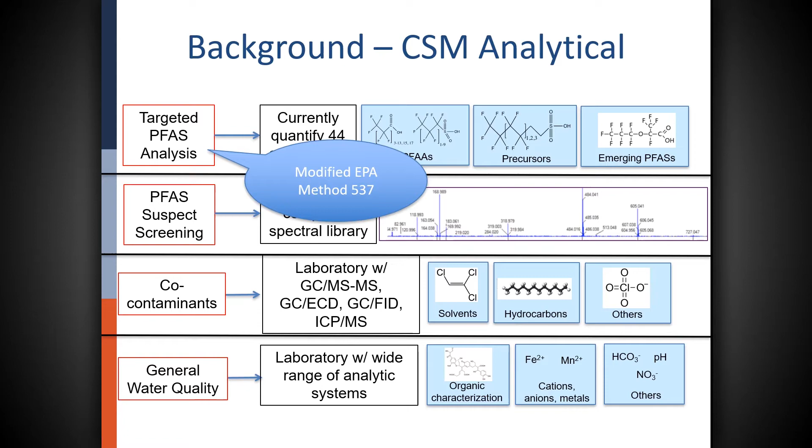So, analytically, we have targeted analysis, suspect screening, as well as looking for co-contaminants and general water quality. Today I'm going to be focusing on the targeted PFAS analysis, which is essentially a modified EPA method 537, because our methods were developed prior to the EPA coming out with this method. We used large volume injection as well as a QTOF.

So CSM is in a pretty unique situation where we have a lot of pilot scale laboratories on campus and off campus. The top left picture is a new facility we're involved with in East Denver, which used to be a produced water treatment facility for an oil and gas company. So there's every sort of technology there available to us to look at different treatment technologies.

In the bottom right, we have a full-scale wastewater treatment facility on campus that treats the dorm rooms' wastewater. And we have a pretty good ability to build pilot-scale treatment systems in-house, such as the bottom left corner.

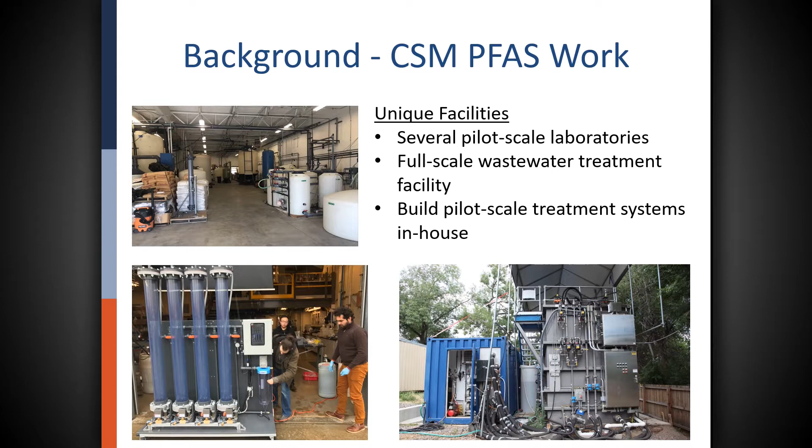So a little bit of background. I might be the only person presenting today that is at liberty to say where some of these issues are, because it has been so widely published, such as this article in the New York Times, which is essentially accusing the U.S. Air Force of contaminating drinking water from a site in Colorado Springs, and the plume migrating all the way down to Fountain, Colorado, which uses groundwater as their supply.

And so this is a public CDPHE map of all the contamination and the plume in the Widefield aquifer, which prior to these issues being published was their only supply.

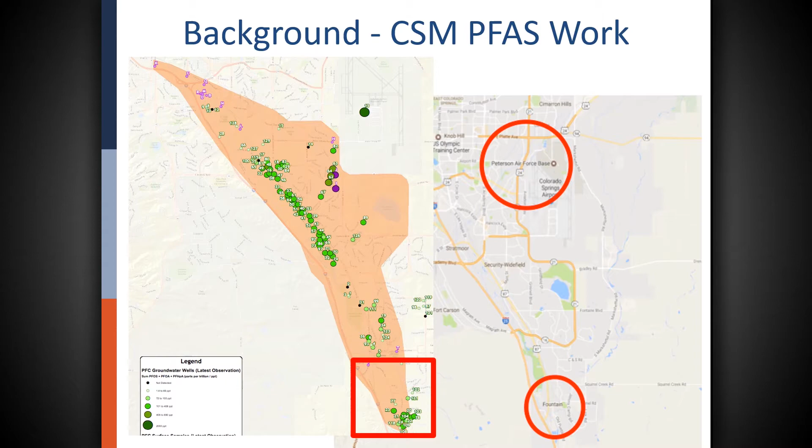So that led to Mines being in a pretty fortunate position. You have this huge site very close to home, and you have these analytical capabilities and essentially experts in the field. So who is the Air Force going to call? Well, they're going to call their legal team, they're going to call their PR, and then they call Mines to set up a system and see what they can do.

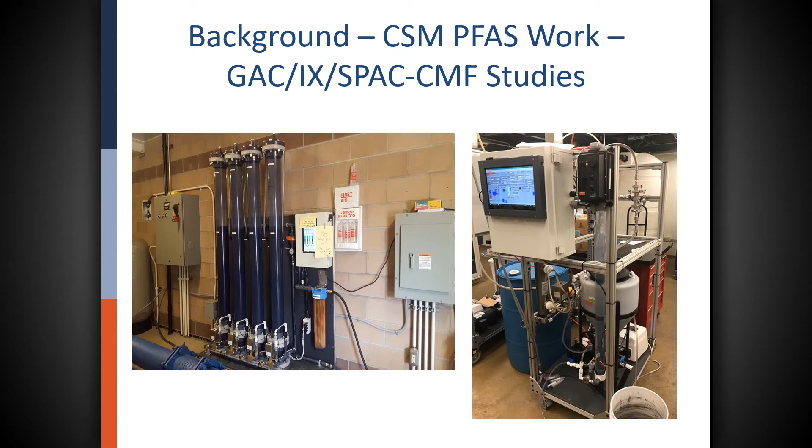So this is the first pilot study on the left, essentially 4 different GAC contactors evaluating the efficiency of all the different media. That led to more studies, and on the right is a preliminary study of submicron powder activated carbon with ceramic microfiltration. That's going to be also a study moving forward with Arcadis as one of the industry partners.

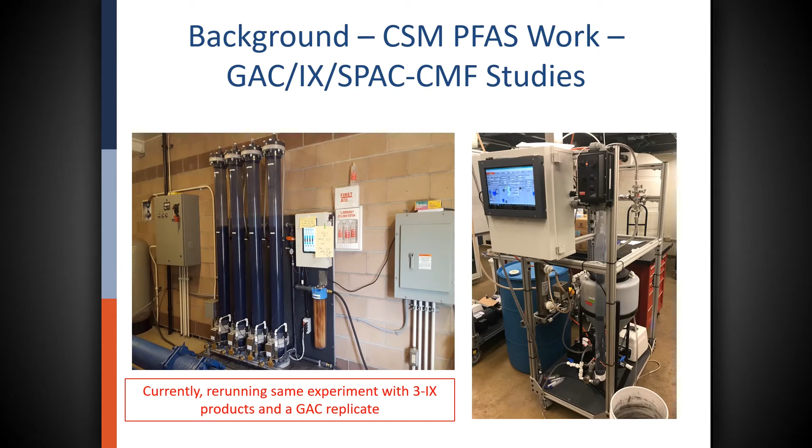The left study is currently being rerun with 3 ion exchange products as well as a GAC replicate to confirm the results from the previous study. And these studies last around 7 months, so the data isn't there from one day to the next.

We also look at novel treatment technologies. This is nanofiltration and concentrate treatment. I won't get into that too much because it was run by another one of our lab members, Charlie Liu. His email's there if you'd like to contact him. Essentially, it's showing that we can get above 95% rejection of these compounds.

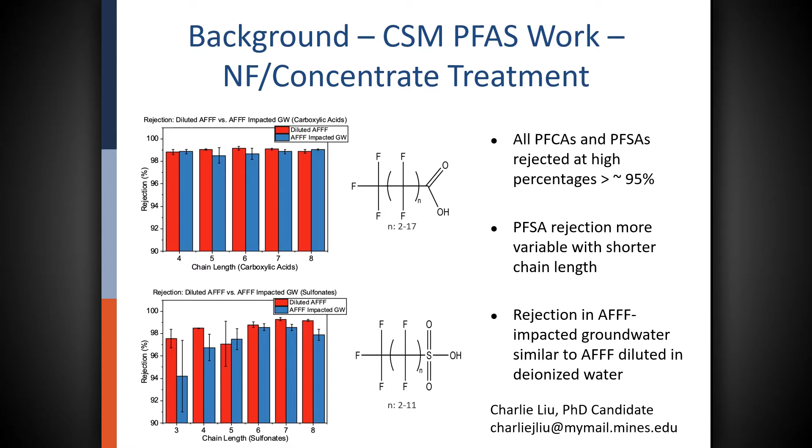And that means when you're rejecting all these compounds, they're all going to be accumulating in the concentrate stream. And you have to figure out what you're going to do with that heavily contaminated concentrate stream. One of the ways they've thought of is UV bisulfite. I'm not very aware of all the processes that occur in that situation, but it has effectively been demonstrated to work, and this is going to be published very soon if it hasn't already been published.

So for the engineers in the room, how do we design these systems? First, one of the most important components is the empty bed contact time of your vessel, because that's basically dictating how fast or slow things can sorb and desorb. Hopefully sorb in this case. You don't want things coming back out into your drinking water. The guidelines for the AWWA say that the median for empty bed contact time is approximately 10 minutes.

However, the CDPHE, the Colorado Department of Public Health and Environment, which I'm going to reference a little bit because we're working in Colorado generally, has come out with recommendations of 10 to 20 minutes with hydraulic loading rates of 2.5 gallons per minute per foot squared and some sort of lead lag configuration, which means you have a lead column and a lag column. Ion exchange systems are somewhat different: shorter empty bed contact times, similar hydraulic loading rates, but bed depths are different.

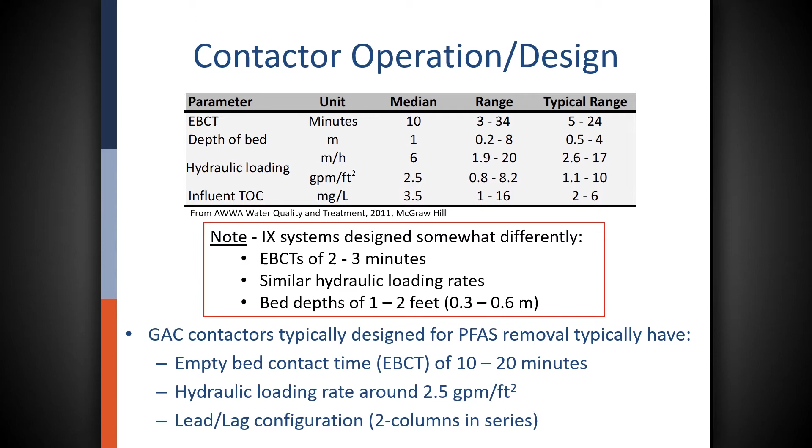And so what I mean by lead lag is essentially you can have 2 contactors. The contaminated water can flow into the first one. It then flows into the second one. They can be set up to have either 10 minutes empty bed contact time each, which would get you to 20, or 5 and 5. Ideally 10 and 10 just for safety. Then you have your drinking water at the other end.

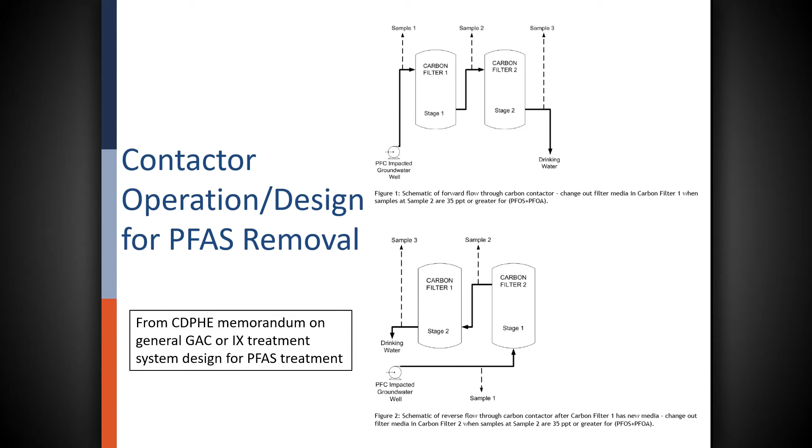When that first column gets exhausted much faster than the second column, you could replace the first column, reverse the direction of flow, and that way it becomes the second column. And now you exhaust your second column and can replace and so forth. There are a lot of ways to do this, including more parallel, more in series. It's really dependent on your source water, what you're trying to do with the water. But there are some guidelines out there for how to design these systems.

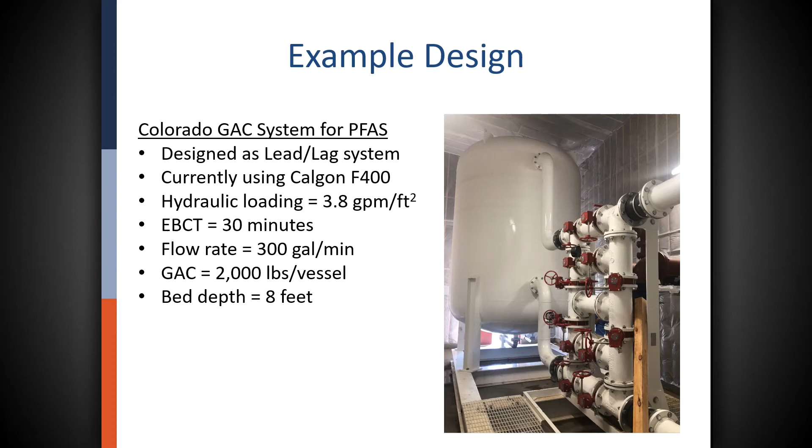So this is an example design of the site we were previously referencing. It has a lead lag system. That complex piping network in the middle is what I'm referring to when it can go interchangeably from one to the other. They're currently using Calgon F400 with a loading rate of 3.8 gallons per minute per foot squared, a very high empty bed contact time, because this was a little bit of a knee-jerk reaction to the situation, and they deployed a system that was a little bit over-designed, but keeping in mind that this was designed for people's safety.

So comparing adsorbents. What are the advantages of GAC? What are the disadvantages? GAC advantages: relatively speaking, it's relatively cheap. There's non-selective adsorption, so you're going to remove a lot of organic carbon. There's high surface area per mass. Unfortunately, it has very slow adsorption kinetics, and you can have quick breakthrough of short compounds. And the PFAS breakthrough is very dependent on the GAC itself. One GAC to another GAC are going to be completely different, so you need a lot of pilot scale testing.

Ion exchange advantages: it has faster adsorption, which can be shown by the shorter empty bed contact times, slower breakthrough for most PFAS, but not all PFAS, and you have the potential to regenerate on site. That's also possible for GAC, but a lot less likely. The disadvantages are that it's relatively more expensive.

Certain PFAS species have lower adsorbability because a lot of these media are anion exchange, and so that means, as Jin perfectly mentioned, there are a lot of cationic, neutral, a lot we don't know, and so all those are going to be moving through because all you're doing is taking the negative charge and replacing it with a chloride. Breakthrough of short chain PFAS is still a little bit problematic, maybe a little bit less so, however.

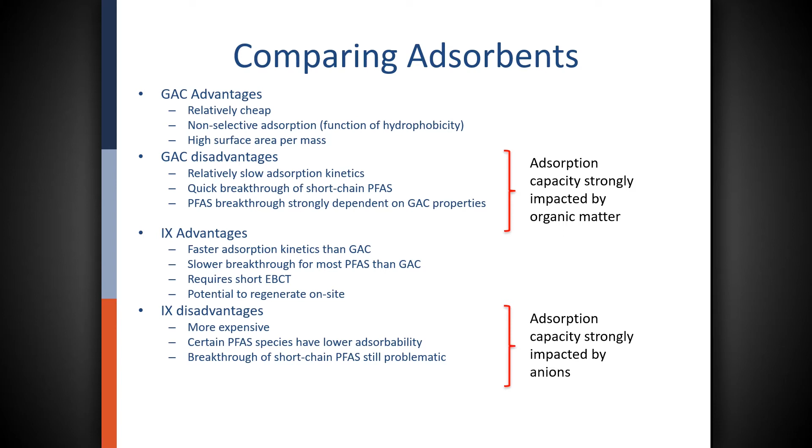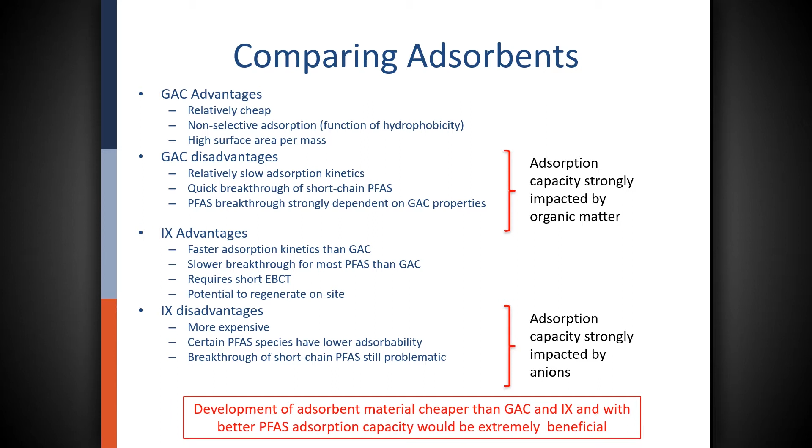And as I mentioned, adsorption capacity is strongly impacted by anions, which is not something that we have studied in depth, but say a sulfate, a chloride, high concentrations, there might be a lot of competition for those sites. So that brings me here today. Development of adsorbent material that's cheaper, relatively, with better PFAS adsorption would be extremely beneficial.

So PFAS work at Mines. We have the pilot scale evaluation of a lot of adsorbents, the NF/RO with UV reductive concentrate treatment, submicron powdered activated carbon with ceramic microfiltration, a lot of short chain PFAS projects, the sustainability of IX regeneration, and FLUORO-SORB adsorbents.

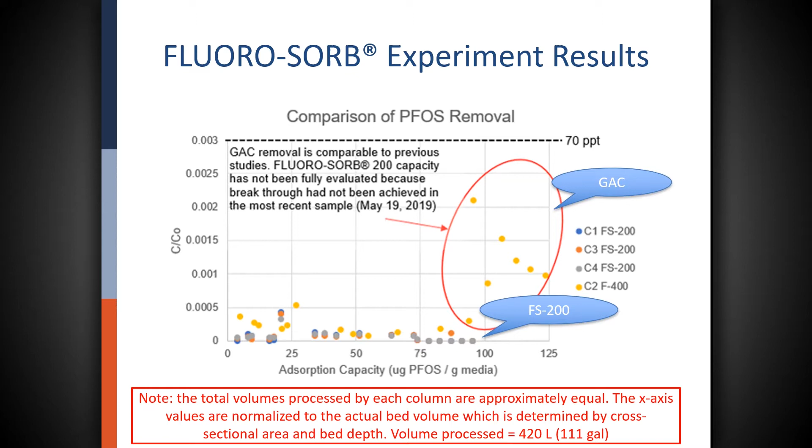We're also going to look at PFOA removal, and we also see this trend that is consistent with PFOS, where GAC seems to be breaking through. It's also important to note that effluent concentrations were higher than expected near the start of the experiment. More samples would be required to understand that occurrence. It could also be analytical difficulties or something along those lines, because the instrumentation isn't perfect, methods aren't perfect. So if another experiment were to show that again, then that would be a little bit more concerning. But as of right now, we're kind of going to sidestep that.

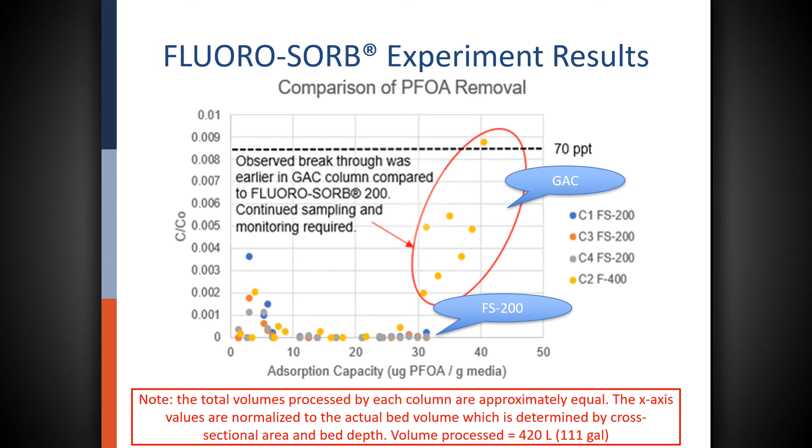So what that means in terms of micrograms per gram of media, between 30 and 50, and this research is still ongoing, so hopefully in the next week or two we're going to have better data. But it's important to note that in both of those graphs so far, we haven't gotten to 70 parts per trillion.

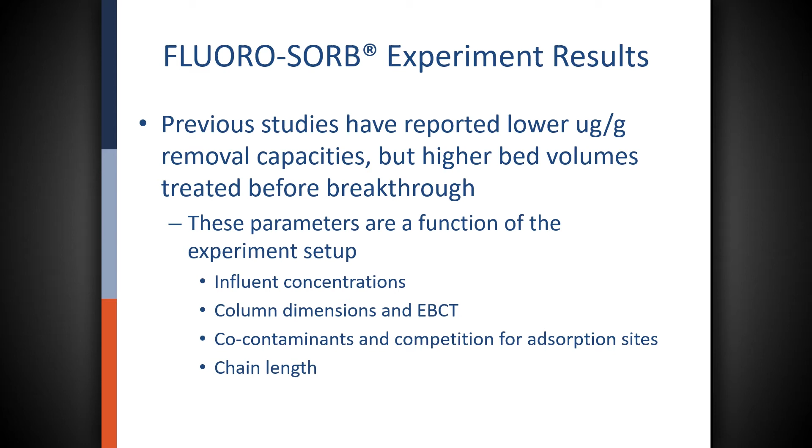So previous studies have reported lower microgram per gram values, but the bed volumes treated is a little bit of a subjective measure in terms of what you're publishing. So you have to be careful when you're looking apples to apples. Different water matrices are going to have different removal. These parameters are a function of the experiment setup, the column dimensions, the empty bed contact time, co-contaminants, and the competition for the adsorption sites, as well as chain length, which is what we're going to talk about next.

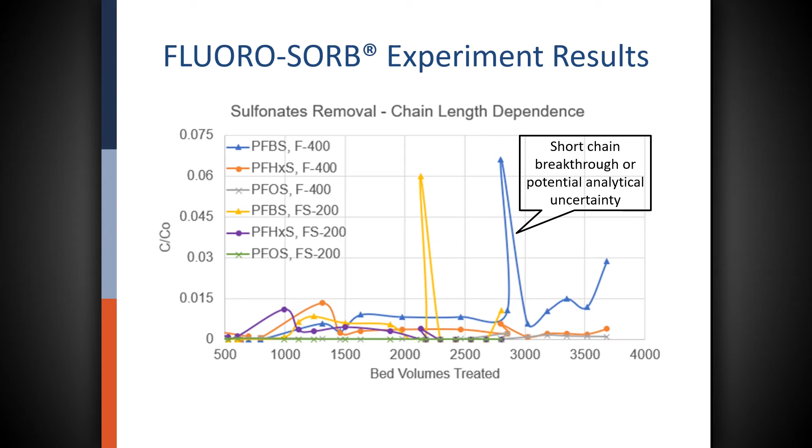So this is sulfonates removal, essentially anything with an S. The important ones in the regulation world right now are PFOS, PFHxS, PFBS. And here at the top three colors, we can see there are a little bit of discrepancies. Some, we believe, outlier points or short chain breakthrough. But as of right now, that's uncertainty. But in general, when you dive into each contaminant individually, you see that granular activated carbon seems to not be working as well as FLUORO-SORB. And that can be seen in most of the other graphs as well.

So we did a similar analysis for the carboxylates removal. That's PFPeA, PFHxA, PFHpA, PFOA, essentially chain length 5, 6, 7, 8. So here we can clearly see that your F400, those top four, so blue, orange, gray, and yellow, are seeing breakthrough much earlier than all the others. Once again, it's preliminary data. We need to continue to extend that line out for the FLUORO-SORB to see how it compares at later times. But right now, this is very positive data to be looking at.

So diving into all the specific contaminants, we look at the PFOA. This is the 50 nanograms per liter, the 10 nanograms per liter. And so from a regulatory standpoint, if these data points happened at a certified laboratory that you were sending your data to, the EPA would probably have an issue with that if that was regulation. However, after a certain amount of time, it dropped back down. So we're fairly confident that these are outliers. However, it can't be determined without further sampling.

And so essentially, all the trends seem to be about the same, where granular activated carbon is seeing breakthrough earlier than FLUORO-SORB. But as I've mentioned several times, we need to continue the research and also repeat the experiment, because one time is not enough to make conclusive decisions. But this is very positive.

I have a question. Yeah. So when you did your column study, you used an individual pump for each column? Correct. So the question is if I use a pump for each column. Yeah. Okay, so we got around needing 4 peristaltic pumps by using one pump, having it feed to a top column. And I think there's going to be another picture later that shows it a little bit more clearly. But basically, pumping it to a tank, that tank would be elevated, so it had hydrostatic pressure above the columns. And that way, it could feed by gravity downwards.

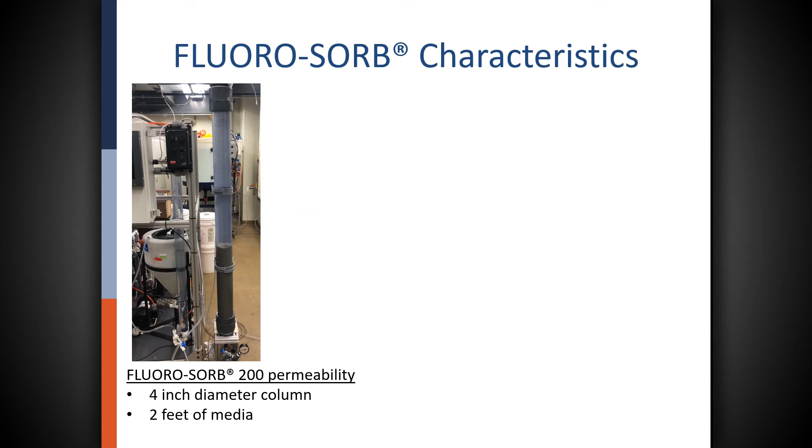Okay. So moving on, we have the FLUORO-SORB characteristics, because that's also important when we're looking at designing systems. We essentially did a permeability test, a 4-inch diameter column, 2 feet of media, and compared the head above the media to what the surface loading rate would be. This was done at 17 degrees C. Any technical data sheet is going to have this at different temperatures, but we are a little bit time limited, so that is the next step in this part of the study.

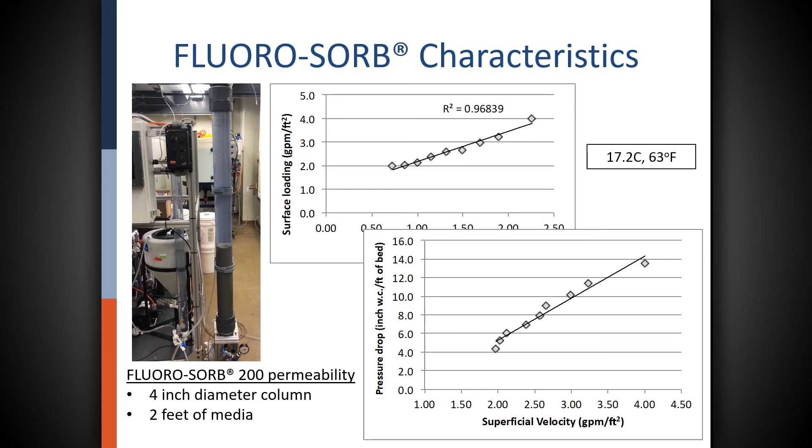And how that looks in terms of superficial velocity, which is the surface loading rate, the hydraulic loading rate, and the pressure drop in inches of water per foot of bed, that's how engineers would look at it and say, if we need a contactor that has 2 feet of media, how much hydrostatic pressure above that media are we going to need to get the hydraulic loading rate that we're looking for. So you would look this up in the technical data sheet, and you would go basically across, figure out how much feet of bed you need. That would determine how many inches of water, and then move across, and then you would link those two together.

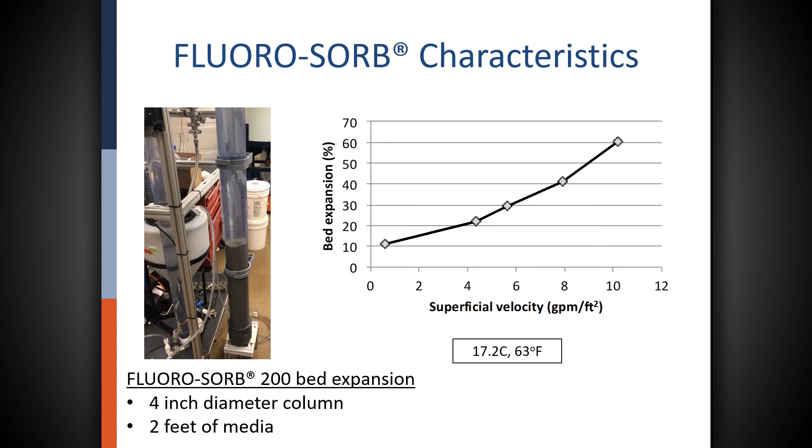So this was the bed expansion. It was done in backwash mode. A lot of these systems are not going to necessarily need backwashing because you're going to be replacing the media when it gets exhausted. However, it's important to note that the bed expansion was slightly greater than GAC, which was approximately 45 to 50% at the loading rates shown there, which essentially means that if you are going to be backwashing, you need to over-design your tanks slightly more because you don't want to be flushing that media backwards out of the tank.

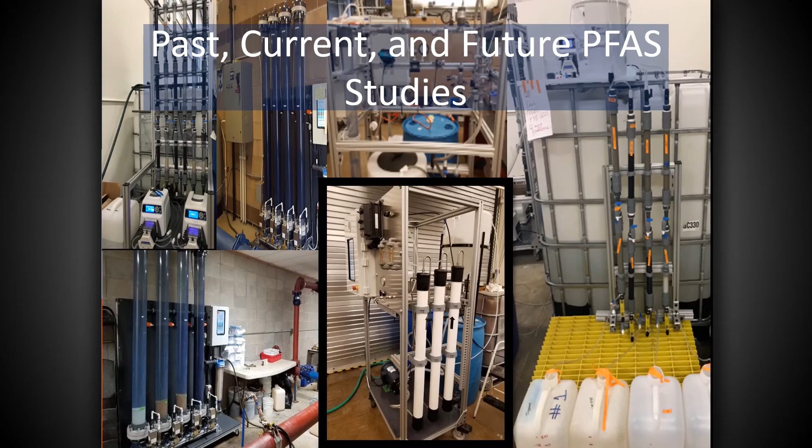So past, current, and future PFAS studies. Basically, we've been looking at all these different technologies with the goal of creating a database so that whether it's the Department of Defense, whether it's the EPA, whether it's consultants, they can know what's best for their clients, what's best for their own sites, what would be the most cost effective, what's sustainable. And so what we do is we create a decision support tool.

Ideally, you put in your influent water characteristics, you put in the removal technologies you want to compare. You can either use literature values for the removal capacity, or you can enter your own that have been tested in pilot studies, and then any other capital and operational costs. And that is basically just going to generate a life cycle cost assessment over time of what you should expect.

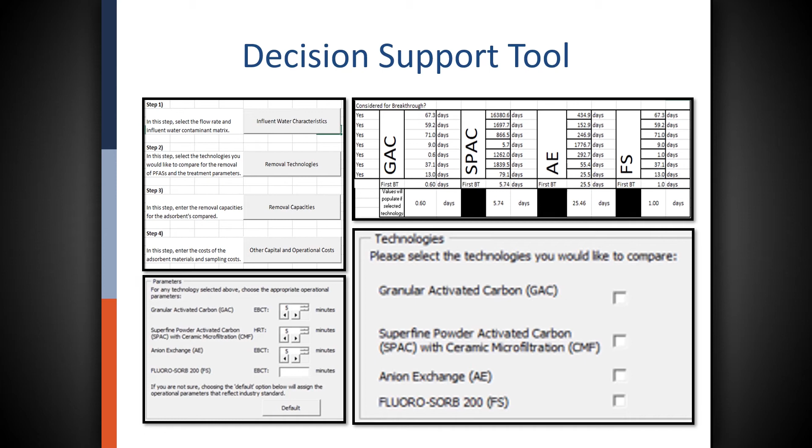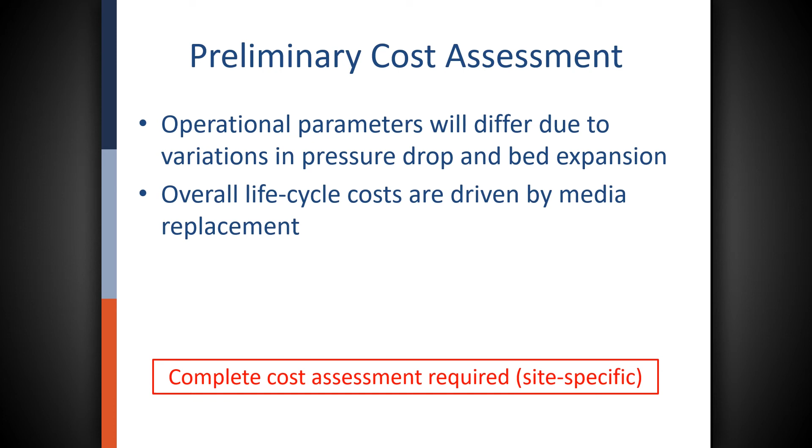So some food for thought, just a little bit of a conclusion. Water quality policies, they don't have a very good reputation. It was studied as recently as 2019, where the benefit-cost ratio of these quality policies was found to be 0.37. That means the bar is very, very low when you're looking at the cost benefit of a policy. However, the EPA is still going to look at this and want to see more benefit than cost associated with it.

So the benefits of reducing PFOA, PFOS, and others is that there are hundreds of millions of dollars spent on healthcare costs that could be attributed to PFAS. We know they interact with our body. However, the adverse effects are a little bit less studied because it's hard to prove causation; correlation is not causation.

So more research is required. When we think about costs, these processes could all be very expensive. So it's also important to note that the EPA is looking at CERCLA as a possible way to deal with these contaminants. If they deem them hazardous contaminants, that relieves a lot of pressure on water utilities, and they can pass off the cost to the people they think are responsible if it's proven that they are responsible.

So research is ongoing. I hope I've made that fairly clear. It's a little bit too early to determine the full adsorption capacities of the media evaluated because we are essentially nowhere near the full adsorption capacity. The preliminary data is fairly favorable. It appears to be comparable with GAC in terms of removing the suite of contaminants we've looked at, and it seems to be a viable alternative, but additional sampling and analysis would definitely be required.